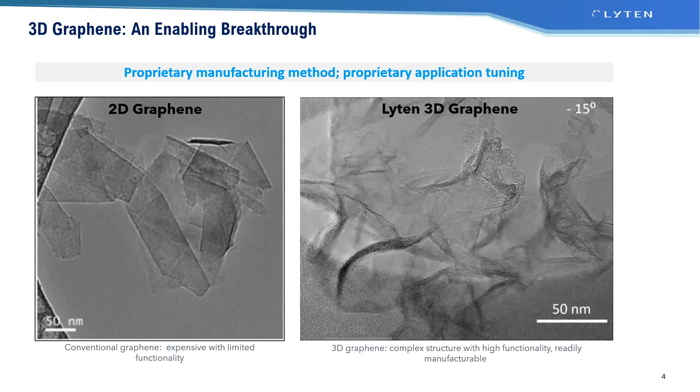So the way we make this graphene, it just forms that way naturally. It's a messier process in some ways. It looks very imperfect, and you're like, wow, I would rather have the flat plates, until you try to put those flat plates into water or solvent and they clump, because they don't really want to interact with any of those things. The imperfect material, which has got all these different imperfections in the crystal structure, disperses very nicely. It looks like liquid. It behaves like, yeah.

The resolution here is kind of weird, but those are carbon layers, right? 50 nanometer, yeah. Like whiskey on the rocks.

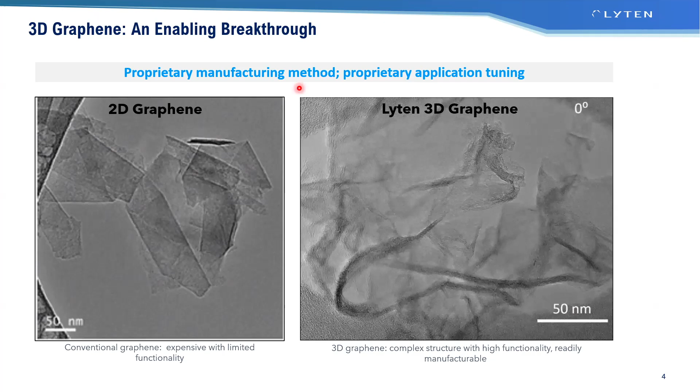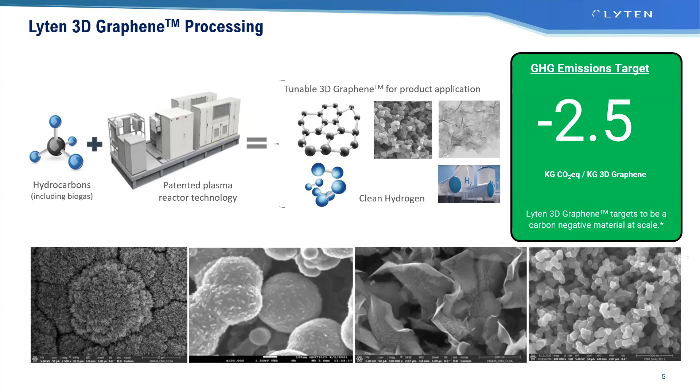Here is what some are thinking about right now. Yeah, so we do this using a plasma technology. We start with hydrocarbons of various types, and we can make really a variety of different carbon structures. So we can make the flaky pieces, we can make spheres, we can do redeposition. We basically can manipulate carbon. And that's what we do. And then we take those carbons and use them for different applications.

So what my team does is we produce and develop lithium sulfur batteries. And why lithium sulfur? The first paper we saw with people trying to make a lithium sulfur cell, 1960s, okay? Like all great electrochemistry. People tried this, and they found it was very difficult, because although the chemistry is very appealing, and the theoretical energy densities are very high, this chemistry is different from conventional lithium ion. Conventional lithium ion, you see the rocking chair, the intercalation chemistry, the lithium inserts itself into crystal structures. Lithium sulfur is different.

Lithium sulfur is a conversion chemistry, which makes it more similar to lead acid batteries. What actually happens is lithium with sulfur forms covalent bonds, okay? And you have real chemical reactions happening. So that gets messy, you get a lot of different chemical reactions happening, and it's a challenging chemistry to work with.

One of the other reasons is because as the lithium reacts with the sulfur, it dissolves into the electrolyte, and you get what you call polysulfides, and those polysulfides want to move to the anode and passivate the anode. This is something they call a polysulfide shuttle, which is a practical limitation of lithium sulfur cells. So you have to address that.

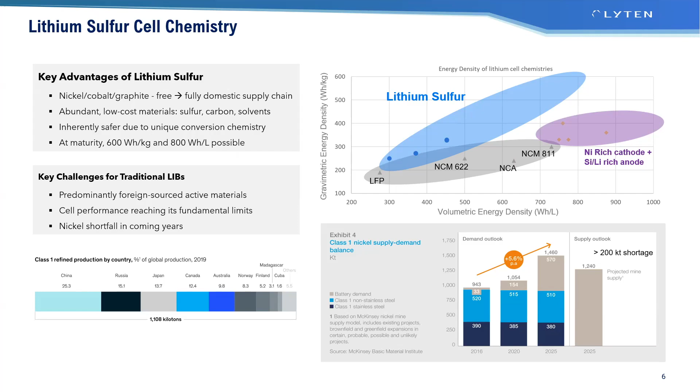And then the regular cars for regular people, the cheaper ones, lithium sulfur makes them actually cheap enough from most people's viewpoint. So that's why sulfur is so interesting. It is still a very difficult chemistry to work with. Many graduate students have spent time doing lithium sulfur, and they are still bitter about it 10, 20 years later. I run into a lot of battery guys at various companies, and they're like, I did lithium sulfur when I was a graduate student. They never work. It's cheaper to hire. Cheaper to hire now. Yeah.

You still need lithium, but as Robert pointed out, there's lithium everywhere. And the technology problem, there's a lot of people working on that, a lot of work in direct lithium extraction, where you use electrochemical cells to remove lithium from brines. Probably very promising, and really probably the technology that allows the US to unlock most of its lithium supply.

So for lithium, you're competing with all the metals, right? The stainless steels. Well, I'm competing for lithium with all the lithium ion guys, because they're all making it. So that's battery guys. But a lot of it goes into steels. It goes into a few different places. Right now, the biggest users of lithium carbonates, the salts, are the battery folks. It's not that big an industry outside of batteries.

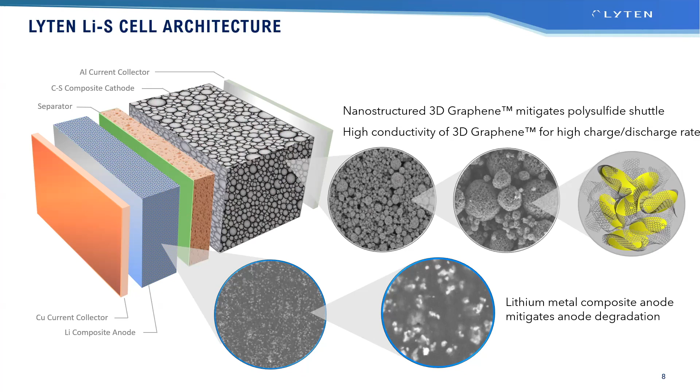And then if you want to create these alloys, you have to create them yourself, which means melting lithium in a crucible in a glove box, mixing other things in it, and then rolling and extruding that. Most people find that daunting, but we're actually doing it in our facility, right, to develop this. So there's a lot of room to develop lithium anodes to improve cycle life.

Most people in the battery world are like, really? You're doing that well? In a practical cell? I'm like, yeah. Most other people find that underwhelming, okay? But the reality is that this is a full depth of discharge cycle, which very few batteries actually see. So most of your cars, any kind of stationary storage, you tend not to drop the battery to zero. You tend to do a partial depth of discharge. And under partial depths of discharge, these cells will go thousands of cycles.

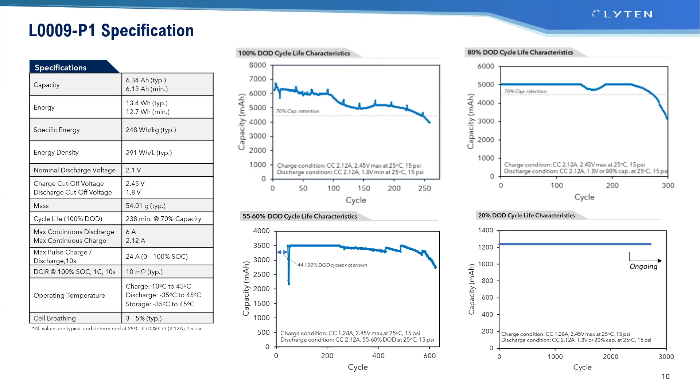The other thing about this chemistry is that it is a conversion chemistry. It is driven by these chemical reactions. So what happens is when you raise the temperature, you get more capacity and you get better rate capability and everything else. So where this cell would do about 250 watt hours per kilo at C/3, right there, if I go real slow on it and maybe raise the temperature a little bit, I get to close to 350 watt hours per kilo.

The other thing we've been looking at, and I don't have the charts, I'm sorry, is calendar life. So if you set the cell on the bench and just let it sit, it will degrade. As you say, it's a living thing. And as you know, if you sit your body on a couch, it will degrade. And if you go and exercise every day, you'll also degrade. It's just a question of degradation. Okay, so calendar life with cells.

That SEI layer is a continuing chemical process, and it eats lithium and it eats electrolyte and other things. We're finding with this cell chemistry we actually get very good calendar life, which surprises people. Lithium sulfur traditionally has been thought of as very poor. What we found is once you make that passivation layer, the cell is very, very stable. So it sits at 100% state of charge, at high temperature, low temperature, doesn't matter. But then it dives down.

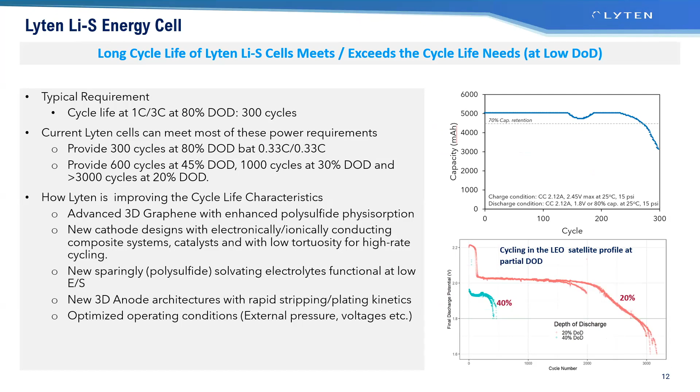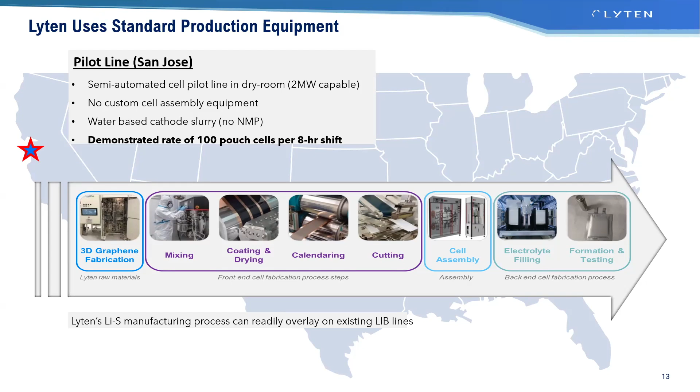We talked a little bit about the cycling. The other thing is we're making all our cells on conventional lithium-ion making equipment. All the gigafactories that are announced, all the equipment makers, that's a lot of technology development in its own right over the last 30 years. If you want to scale this technology, you better make it on machines people already use for cell making. That is what this chemistry does. We have to make our own cathode active material and modify equipment slightly, but we use all standard lithium-ion equipment.

Selena, request from Zoom: if you could flip back to slide number 12, please.

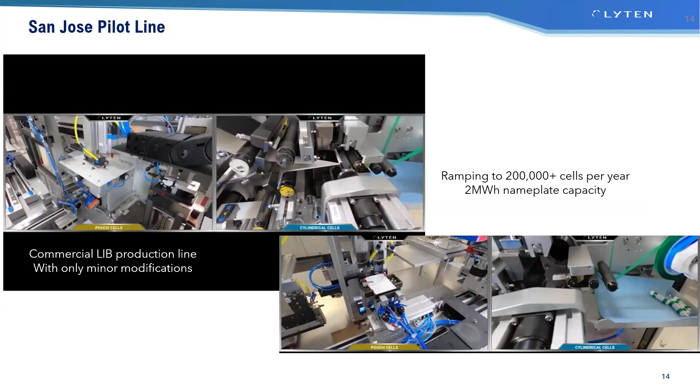Jelly rolls for cylindrical cells. Pouches are typically used for anything that people want really slender; they have the best energy density. This contains a pouch cell. The typical pouch cells you see, like for remote controlled aircraft, are stacked or wound, but usually stacked now. Cylindrical cells are actually faster to make. They're in cars, and you can make them at high volume more quickly. The production is sometimes a little trickier, but it goes faster.

Why do you have to make thousands of little tiny cylinders instead of big cylinders? Well, there's a few reasons for that. One is the safety issue. So a cell contains a lot of energy, right? If a small cylinder releases that energy quickly, you can dissipate it, you can manage it. You get a big cell, way harder. So safety is one of them.

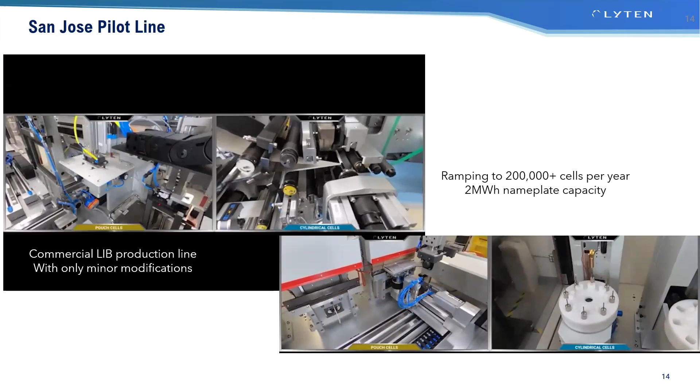The other thing is, if you make a little cell and it's got a defect in it, you reject it. If you make a big cell and it has a little defect in it, you have to reject it. The cost differential, the scrap cost, production reality, is that for the cell manufacturer, it's a lot easier to make a small cell and reject. Even if your scrap rate's low, it's painful. If you have to reject all that electrode, it's really painful. Got it. Same paradigm you were talking about in the last presentation. Right, exactly.

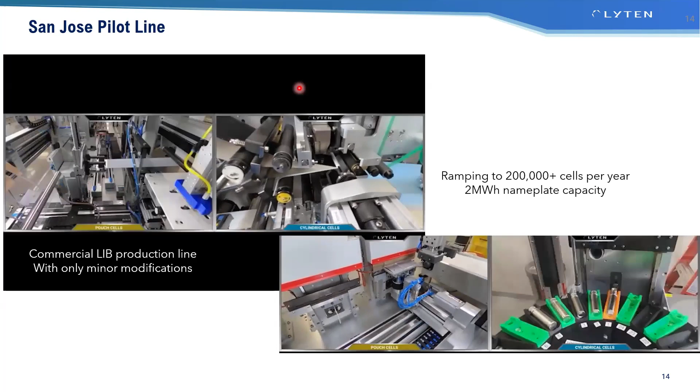How do you work with lithium? So lithium is not as terrifying as everyone thinks. In the metallic form, you can handle it in a dry room. So you have a super dry room, and you need dry rooms for most of these chemistries anyway. If you look at the high performing cells like the NMCs or NCAs that are in Teslas, those cells are made in dry conditions in dry rooms.

And if you go in those factories, you walk out of them feeling like a raisin because you've been at minus 35 degrees C dew point in the dry room. It's that dry, and that's to actually protect the nickel chemistry. LFP is a little different, doesn't require as much drying, but it still requires some because all the electrolytes, the lithium salts, react with moisture. So anywhere that you've got electrolyte, you have to dry anyway. So putting lithium metal into that dry room is actually okay, and you can manage it.

So where are we? Now, we have about a 2 megawatt hour line in San Jose, where we produce pouches and cylinders. And then we just bought that Cuberg facility, so we're putting about 100 megawatt hours in there over the next year and a half. And then our long-term plan is putting a gigafactory in Reno, somewhere 6 to 10 gigawatt hours. It's kind of modest for gigafactory scales, but this is actually a good scale to supply micromobility, stationary, heavy truck business. It's not automotive scale.

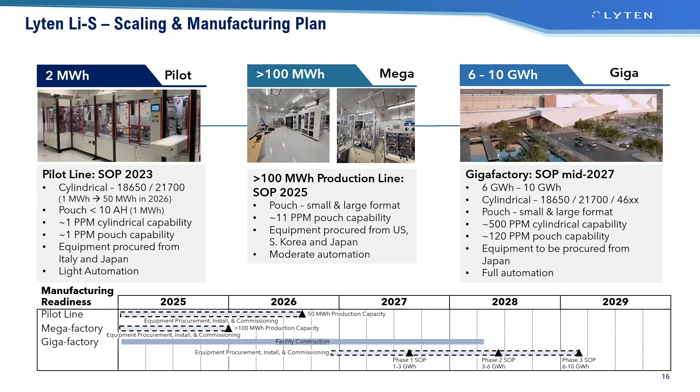Ready for a Tesla question? Sure. So I had a heavy foot on my gas pedal. Yeah. And I step on it. And have you ever seen a three-phase motor? When you are switching two phases, it wants to go full blast in the opposite direction. That's what I felt. I stepped on it. I got a full blast backwards, like I hit the wall.

Okay. At that moment, the car loses all the power. Then I notice that I have about 5% of power. I pull over, call Tesla support. They are telling me, okay, let's try a reboot. I did the reboot, and the car goes like nothing happened. They take the car into service, and when it comes back from service, it comes back with a new battery. That's a puzzle for you.

That is a puzzle. How can I do the same? I would like a new battery. Try to step on it.

If you're within warranty. I could not figure out why they changed the battery and why a reboot revived my car from literally having like 5 kilowatts to just pull over and stop. And when I stopped, it just stopped for good. Okay. And after reboot, it totally woke up. We have to repeat that not under supervision. It's the sensor which is reading the battery.